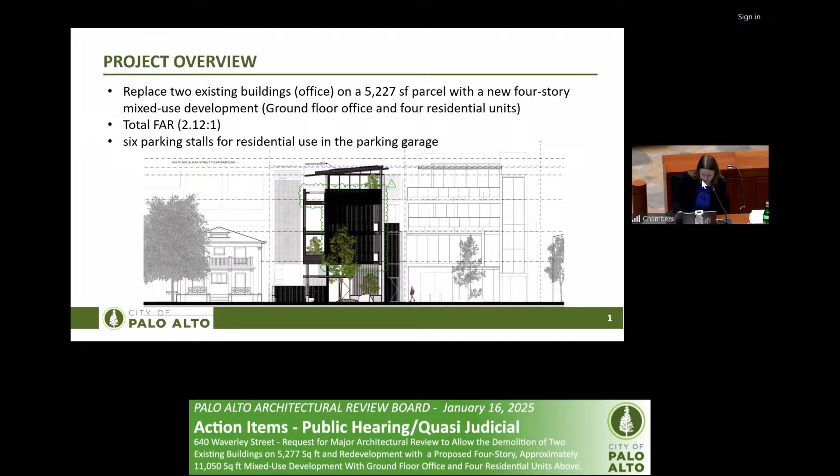The project is designed to meet the intent of the objective standards as allowed in the code versus meeting all of the objective standards. So the project is processed as a major architectural review with a formal recommendation from the board, and it's subject to the context-based design criteria instead of the objective standards. It's also subject to the downtown design guidelines, although there aren't really any relevant ones that apply to this project, and the CDC zone district requirements and the ARB findings.

This is just a brief site overview of the site plan.

Key modifications based on ARB comments included some additional details regarding how the parking worked. In particular, this is a unique design that has a lift system down to the below grade parking garage. There are additional details in the staff report showing how this lift system works. Basically, it goes down and isn't visible—there's a gate that blocks it when looking at it from the street. When a car needs to come out or go in, the lift system comes up, and this is a general concept of what that's going to look like.

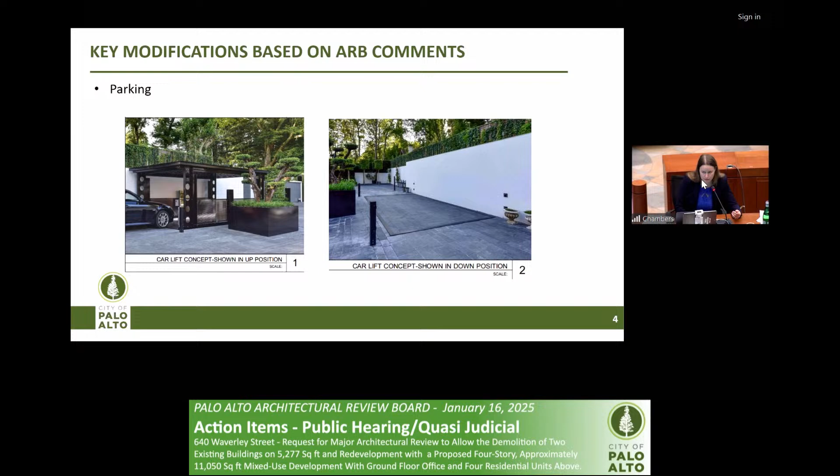This was redesigned, if you recall, based on a number of discussions with the neighboring property owner, who had concerns mostly about how this development was going to look in comparison to looking out his windows. He really didn't want something large in front of his kitchen windows on the side of his property, so the applicant worked with him to find a design that would be acceptable to him. This is what's now proposed for the project.

There were also comments about context with 636 Waverley on the other side of the property. There were concerns with how much cement was being viewed—could we provide a better design with less cement that the neighboring residents would be looking out onto? So there have been refinements to the design. They do have to meet building code, which was a significant concern in how to meet those comments while still meeting building code.

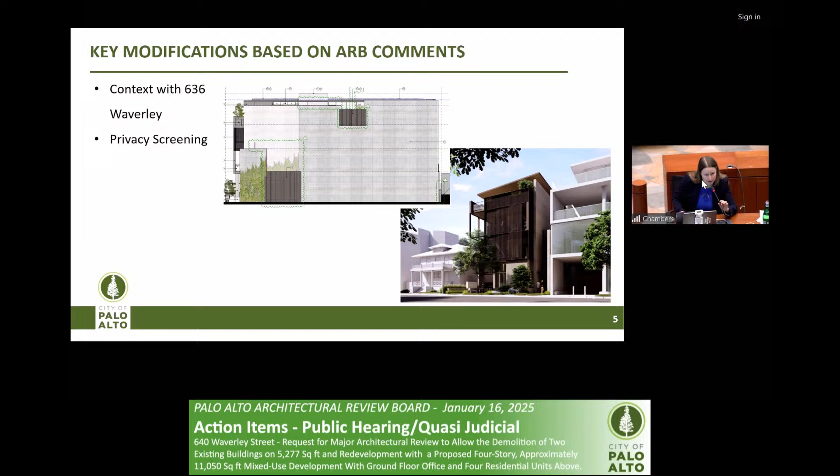There have been refinements to add different material on that 4th floor level, and refining the design and location of that outdoor area. Privacy screening on the frontage was also a concern—how that looked from the street, and whether it would end up looking too boxed in. So there were modifications to the design that added some space between the slats to allow a little more visibility in. I'm sure the applicant will speak more to that in their presentation.

There were also concerns about plant maintenance and planter design. Additional details were added to show the planter design and some modifications to the planter locations. There was also a memorandum prepared by SWA Landscape Architects to explain how the plants would be maintained long-term, and standard conditions of approval were added for long-term maintenance. We aligned the conditions of approval with what was presented in that SWA memo to require that they implement those measures.

In addition to these modifications, the California Environmental Quality Act review was not complete when we came last time, so that was the reason we could not make a recommendation last time. It is now complete. The city prepared, in conjunction with David J. Powers and Associates, a 15183 streamlined review for infill projects consistent with our comprehensive plan and environmental impact report. There were measures implemented consistent with the mitigation measures required under the EIR, mostly related to noise and vibrations to protect neighboring properties and residents, and standard conditions of approval incorporated for protection of cultural resources.

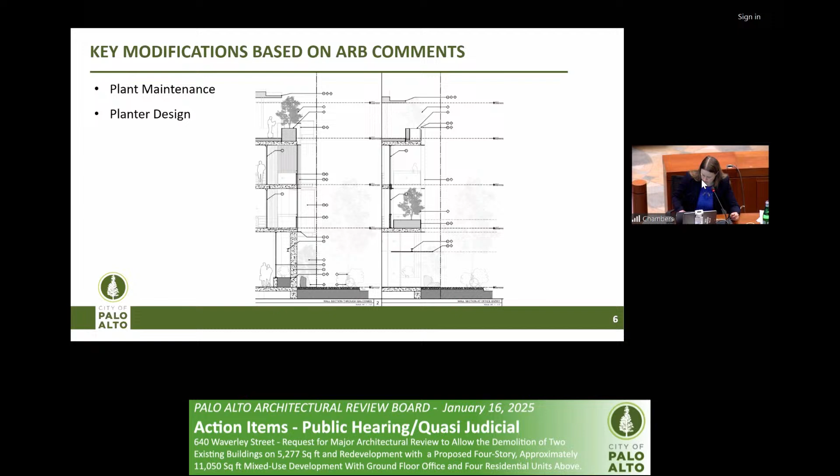Staff recommends that the Architecture Review Board recommend approval of the proposed project to the Director of Planning and Development Services, based on the findings in Attachment B and subject to conditions of approval. With that, I will turn it back to you and recommend that you hear from the applicant.

Thank you, Claire. I apologize, I'm a little out of order coming back to this first meeting of the year. I did want to ask for any disclosures and whether other board members have visited the site. Since this is the third time we've seen this project, I would assume everyone has visited the site before, but I'd like to restate whether they have visited it recently, and if there are any additional disclosures since our previous ones. We'll go down the line.

We'll start with Board Member Adcock. No additional disclosures. I visited the site at the previous hearing.

I visited the site on Tuesday, and I was not here during the last meeting, but I watched the video. I have no additional disclosures.

I visited the site at the previous hearings. I visited the site yesterday and this morning. No other disclosures.

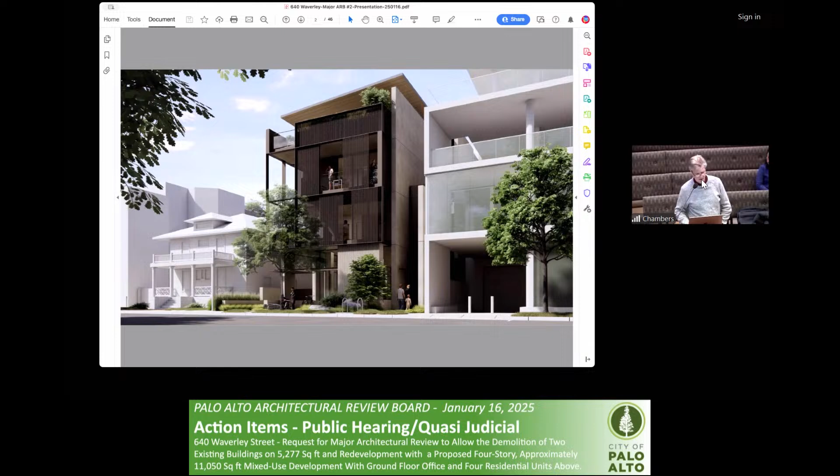We were here in June and had really good feedback from you, and there was actually a straw vote held, but no action could be taken because, as Planner Raybold said, CEQA had not been completed yet. Now it's completed, and we've used the time since then to respond to some of your comments. I'd like to go through those, as well as some refinements we've made to the project.

Just to reacquaint you, full screen. This is the basement. All the parking for the housing is in the basement, and storage is there for the residential units as well, so there's no commercial associated with the basement except for any kind of back of house.

Anything in red is essentially areas that we've addressed, either responding to comments or things we've changed. So we're going to talk about this side of the building where the residential entry is. We still have the paseo. Everything else is as you saw before.

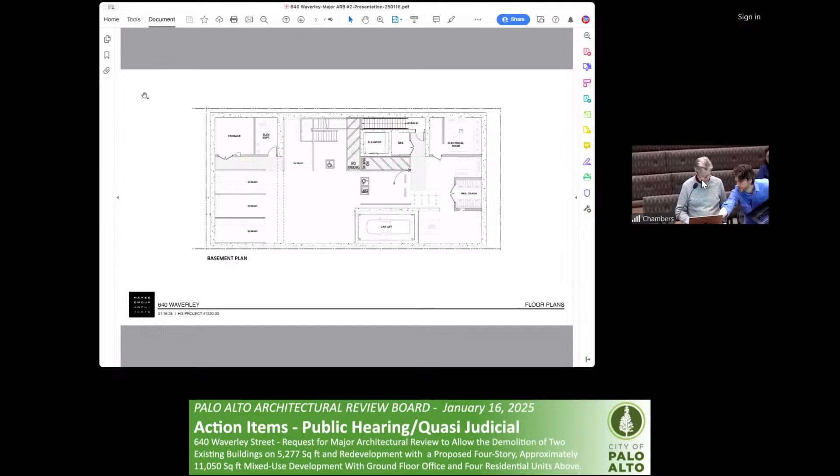You guys don't see it? We do not see any color on the screen. There we go, I thought I was in a PDF. Anyway, not a problem, okay.

So, all right, now that's the first floor. We still have the paseo, the stair two at the rear, the courtyard, the car lift, and now...

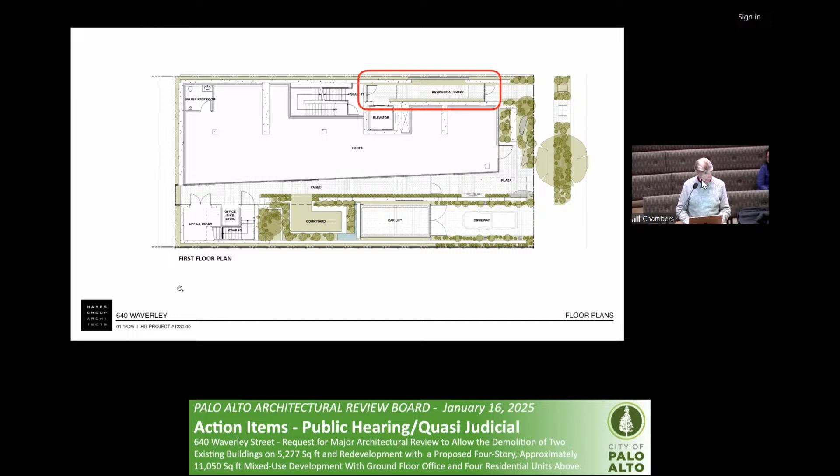All right, so now it's not advancing, Mason. What's going on? First meeting of the year always has hiccups. Okay, don't all worry about it, should it just leave me alone. Sorry, all right, stop share. Well, I can share. Ken, it's time to let your kid take over.

What time is it in the morning? Everybody reaches this point, you know. So,

Am I doing it? Yeah, I'm gonna let you do it. All right, so let me go back. And I thought these were PDFs. They are, yeah. But okay, all right, there we go. I didn't know why it wasn't advancing.

Okay, so now we're on the first floor, explain that. Now we're on the second floor. Again, we're addressing the residential entry area as well as stair two. On the third floor, similar areas that we've addressed. And remember, there's a 1-bedroom and a 2-bedroom on the second floor.

There's a 1-bedroom in front here on the third floor, and at the back is the owner's unit where their bedrooms are. On the fourth floor is the owner's living area, which we're also addressing, the screen in front, and you should have that with you there. Then when we get to the fourth floor, again, we're addressing the interface with 636 Waverley.

Comments from last time, you said, can you provide a diagram of procedures on how that lift works? I'm happy to do that. I have slides at the end of the presentation. We can cover it then if you're interested, but it's too much time right now, and since I screwed up, I have less time. So it's on A01.0 if you want to see it. This is the lift down and the lift up.

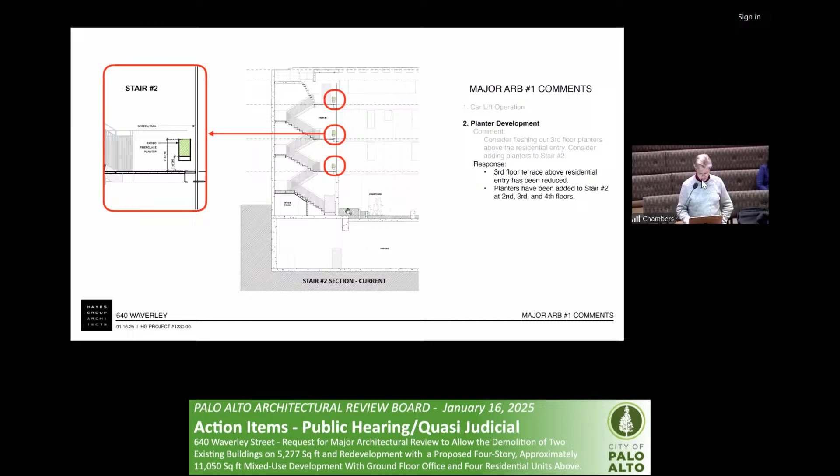On the stair, we have added planters at each of the landing levels. That's a planter that is fixed and attached, and it can be watered and maintained from the stair side, but the creeping fig will grow through the vines, and it'll also be creeping fig in the planter below, which is where we only had it before, and it was probably optimistic to think it would grow all the way up the lattice.

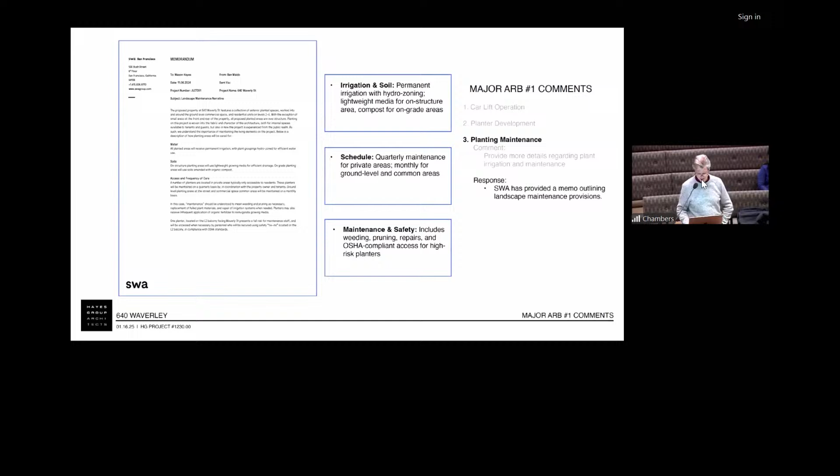SWA did provide details regarding planting and irrigation. The takeaway is there's permanent irrigation to all the planters in ground and raised planter areas. The schedule for maintenance will be quarterly for all of the private areas and monthly for ground level common landscaped areas. Maintenance means replacing dead plant material, fixing irrigation systems, pruning, weeding, and so on, as well as access for planters that will require OSHA compliant access, which is a couple planters at the front.

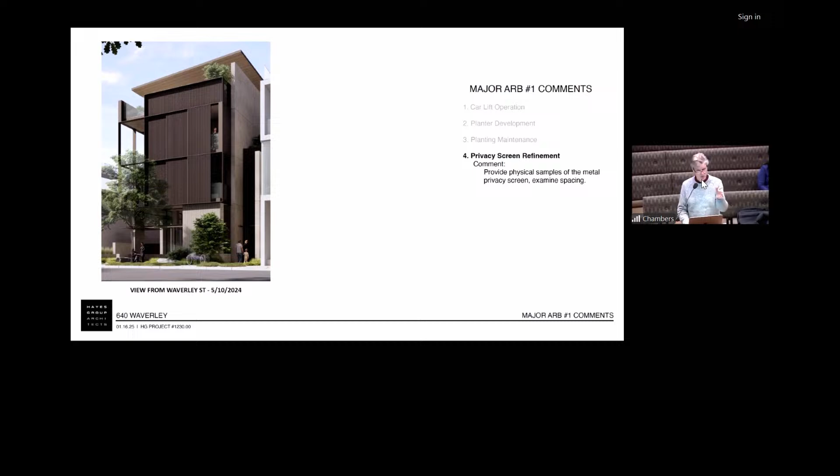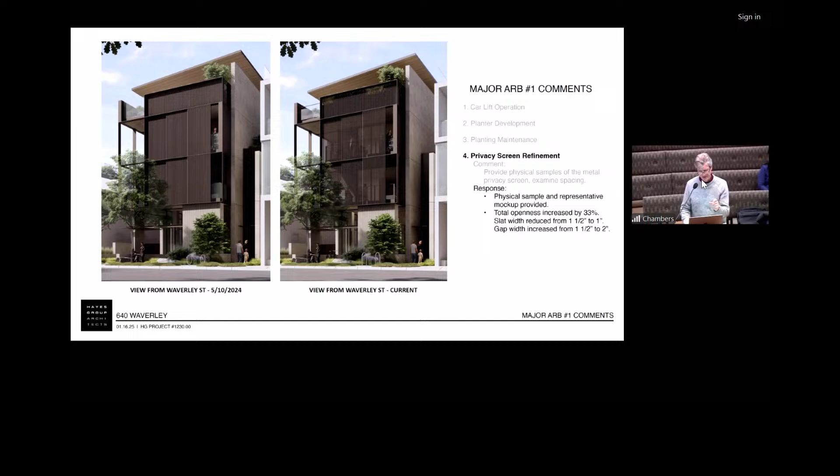Another comment you made was maybe you should study the spacing of the grill work, which you have there in front of you. We've increased that spacing by about 30%. So it's a 25mm bar, or it's an extrusion, and then a 50mm space, 25mm bar - so it's like 1 inch, 2 inch, 1 inch, 2 inch - and that will be the spacing of the screen, and the screens still stay operable at the front so that you can control your privacy there.

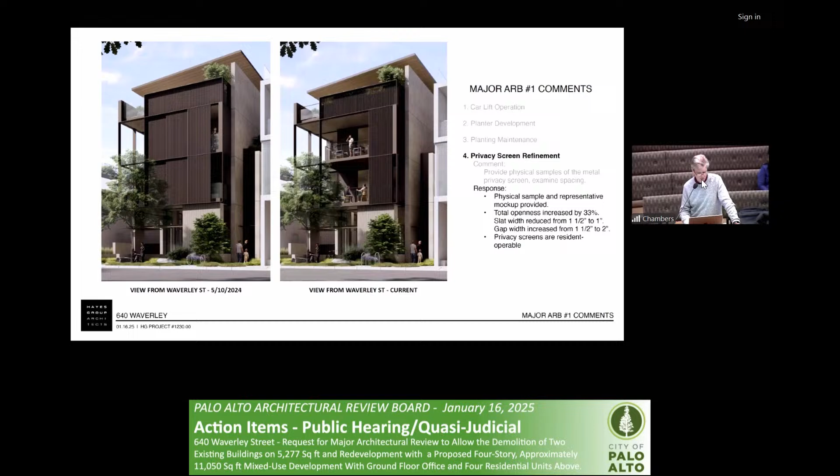This is where we were last time on the interface with 636. You said, hey, think about maybe how it could soften up and respond better to 636 Waverley, a building that we also designed 10 years ago.

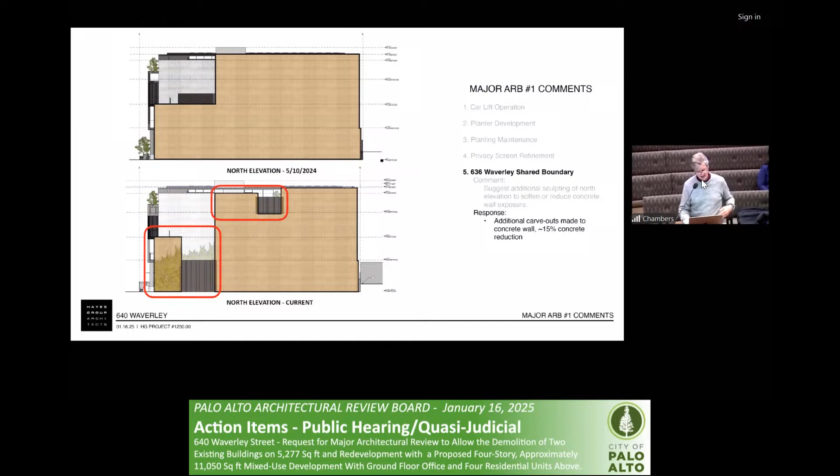Looking at this, the gray drawing on top was the previous submittal where we had all the concrete, and now we've modulated it down below. We've created more cutouts that reduce the scale, but what's cool is that those cutouts now respond better to the footprint of 636. So where 636 has a void, we've increased our void into the building there.

So inside, actually, it's much nicer. You can see the sky. You'll get some late afternoon sun, perhaps, but we still have the privacy that we want from the unit next door. Those are bedrooms of the unit next door that would face into this area.

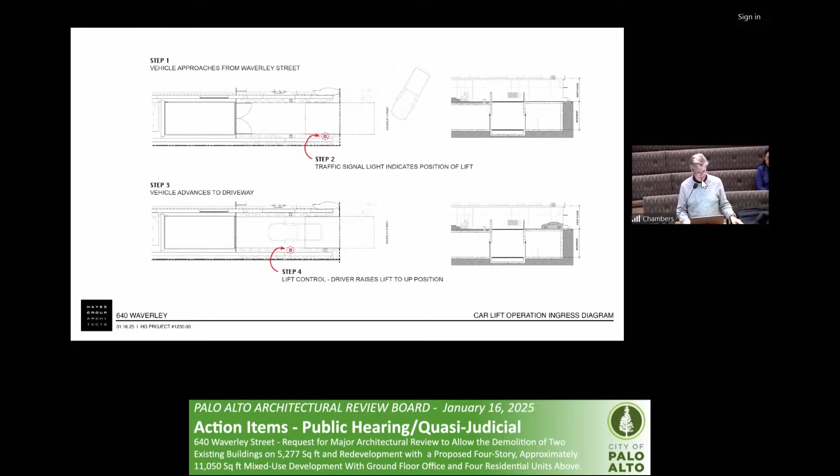Step one, as you drive down Waverley Street, there'll be a traffic signal on a bollard that will either be red or green, indicating whether the lift is in use. You would pull in - that's step two, the traffic signal. Step three, you pull your vehicle in on the podium on the left, you hit the button, and the lift rises up from the basement. It's always in the basement.

Then you hit your fob in the car at step five. The gates open now that the lift is up, and you drive onto the lift platform. Step six, you hit your fob and the gates close, then step seven, you hit the podium, and you descend down into the garage as the diagram on the right is showing. Step eight, you get to the bottom of the garage, you hit your fob, the gates open, and you drive into the garage.

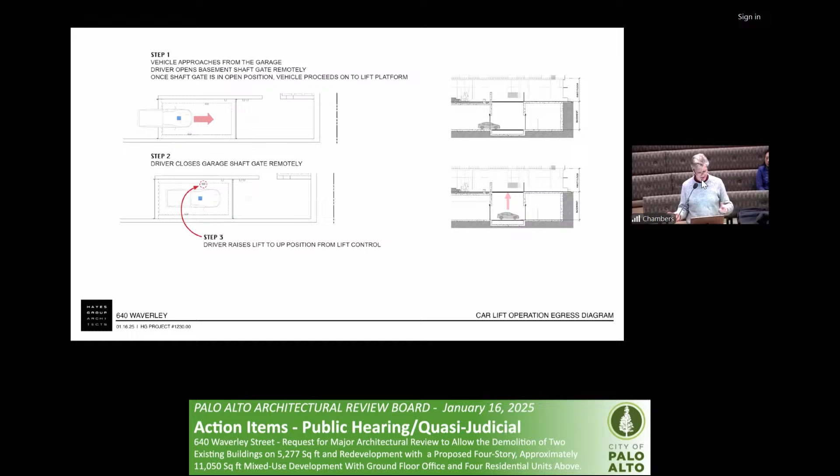And then it's kind of the reverse going out. Probably don't need to go over that, but you hit the gate, you come in, now the podium is on the left, or the button - there's two of them, one on either side of the vehicle. And then you go up, hit the fob, and out you go to the street.

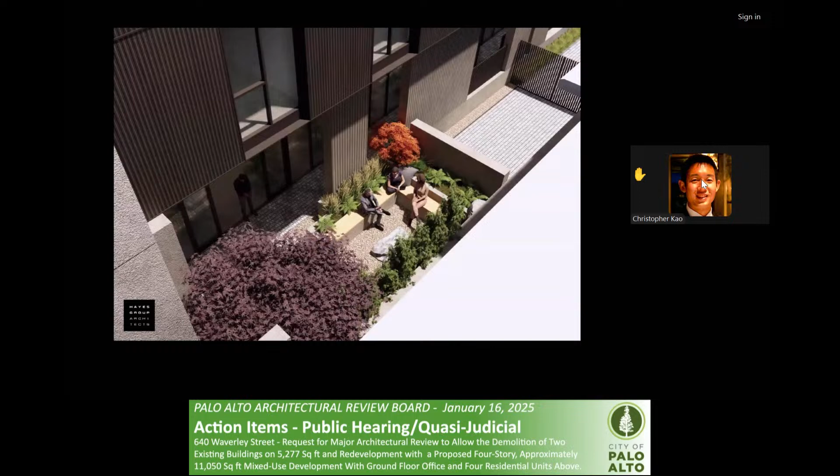Okay, I am a resident of East Palo Alto. I often see this existing building, the one that was mentioned at 636. I'm a big supporter of this project. I remember the first time I encountered 636, the existing project, was when I would often frequent the Palo Alto Farmers Market on Saturdays, and because the parking lot is right there to the south, it's the one thing you see. I've always been really inspired seeing that building. I think it is really cool seeing that density, and I liked all of the landscaping on it.

I always wondered when this lot next to it would become something like this, because it kind of stands out right now. It'd be nice to have more. So I just wanted to offer some support for this project. I'm not getting compensated to say this or anything, I'm speaking freely, and I just think it really beautifies this part of Palo Alto.

Thank you very much for your support, appreciate it. Is there anyone else? That's all our speakers.

Did we also get a letter of support in for this project sent via email? Yes, correct, part of the public comments emailed out yesterday morning. I can briefly summarize: it was Stephen Levy, who noted that he lives nearby this project and expressed support for it.

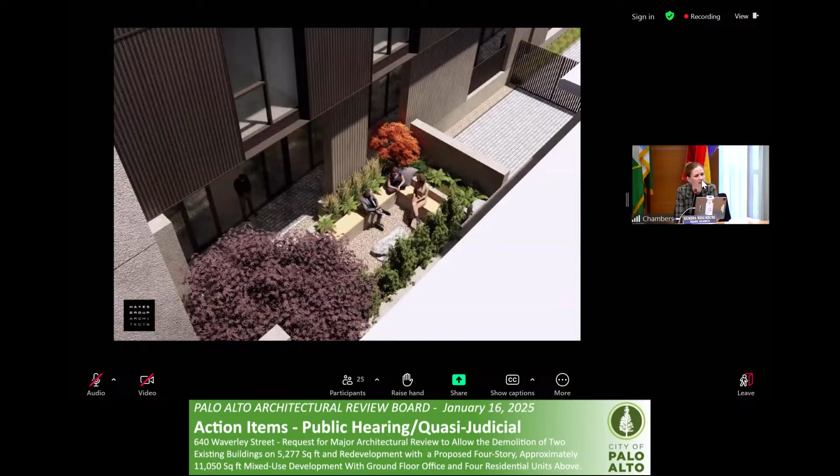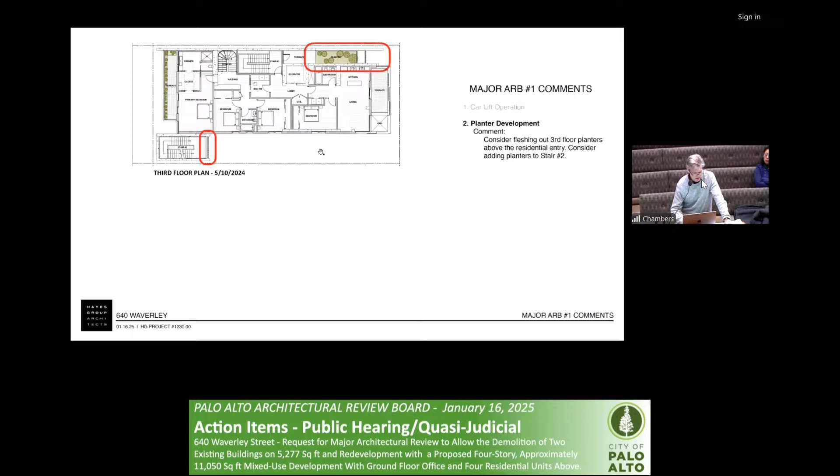Morning, Mr. Hayes. The rear paseo, does that open to that rear parking lot, or is that closed off now? No, it is open. Okay, and one of the floor plans, if you don't mind pulling that up, that main floor plan. Yeah, there's a planter, there's an elevation difference, several feet, like probably 30 inches. But when you look down the paseo, there is daylight and you're looking above - that one, yeah, that's green open there, yeah, that's a low planter.

Okay, so can you walk from that paseo out the back? No. No. Okay, and the reason for that is it's private property owned by the city. Was there ever consideration for a gate on that rear end, anything like that, just in case there was an emergency egress situation, something that would 99% of the time stay shut, but just in case of a quick evacuation could provide that? We've never considered that, no. Okay, not a problem, just asking.

And then with the car lift, I really sincerely appreciate your clear example of how that works. My question is in regards to right of way, and I don't know if you'll necessarily have the answers right now. If a car is coming down the road and trying to pull in, but there's a car actively coming out, I assume that car would have the right of way. Now the question is if there's a car that wants to leave and a car that wants to get in, and neither of them have gotten to the lift yet, who gets the right of way? Is it just whoever hits the fob first, or is it sensors?

I think that as soon as someone activates the gate in the basement, the light will turn red. And there's probably going to be 2 minutes between that time and when the car actually is able to leave at the ground floor level. If there's no traffic, you've got a car waiting. If there's traffic, I would imagine they'll go around the block and then come back.

But there's only, I mean, there's 8 spaces the way the city and the state counts parking, because the unloading space for the ADA van and the EVSE are counted as spaces, but there's really only 6 cars in the basement. So we don't anticipate a lot of traffic. Sure, and yeah, it's a rare instance, I just want to see what it's accounting for.

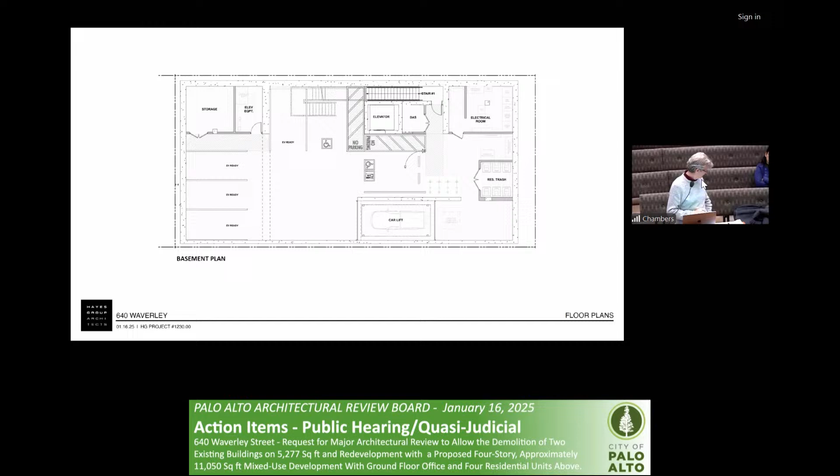Okay, it has a gate, so you can get traffic. Oh yeah, it has a gate. Okay, thank you. So yeah, you could. So the residents bring their trash up that way.

The trash room for the residential, in the set there's a page that diagrams how the residential trash facility works in the basement. Originally we had it all at grade, and one of the comments we got at the preliminary was to separate them. I think Board Member Hirsch said it, separate the residential and the commercial, and the residential maybe needs to be more convenient, so we put it in the basement. If you're going out, you bring your trash down, but trash on trash day can be taken out up the car lift.

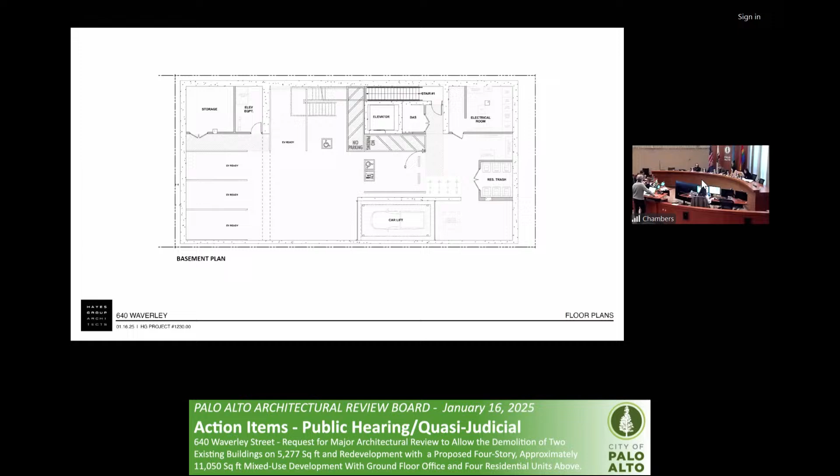And so there is a gate. It's pretty convenient. Okay, all right. That's all my questions, thank you very much.

May I ask a follow-up question on the gate? The car lift gate, how does it work? Is it functional like up and down, or swing? Swings, okay. The gate that is at grade, at the driveway, no, at the basement, I believe they go up.

And that's why you have the basement so deep. That's one reason. And there may also be an idea of future parking. If there's ever a need for future parking, it could add lifts, or something. Yeah, I was going to ask whether you considered the puzzle parking system if needed.

Yeah, so we're fully parked for the residential right now, and then there's no commercial parking. This project does not work if commercial parking was imposed on it. You cannot have a driveway like we have. So that opened this whole thing up was when AB 2097 allowed us to eliminate the commercial parking requirement.

Yeah, I understand that parking is actually not required in this case for residential, but you provided some parking space in this case. And if you consider the puzzle parking system, then maybe you can save one space for maneuvering, like turn back and be easier for the car to get in and get out on the lift. Oh, like a backup space or something, right? Yeah, right.

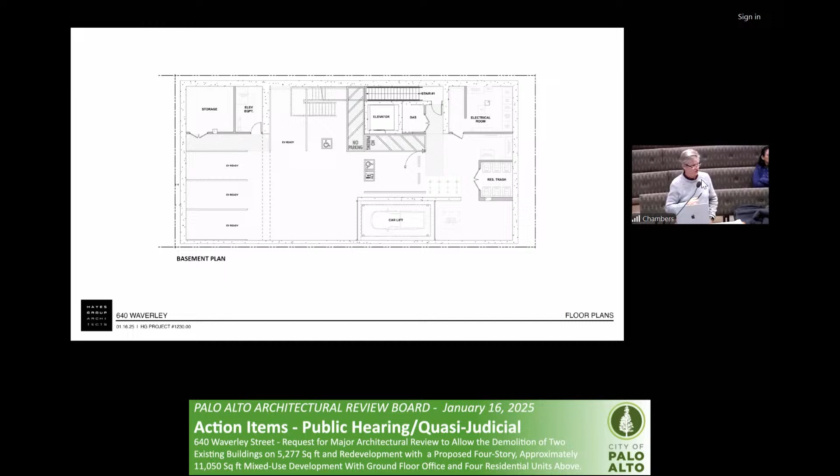And for the privacy screening, the finish would be wood look-alike, or? No, it's not wood, it is the other finish. It's the dark ribbed finish that Board Member Hirsch is holding right now. Okay, then, those are the fins. Board Member Hirsch, do you mind passing some of those down? Yeah, we will hold them up for the camera. That's the spacing, okay.

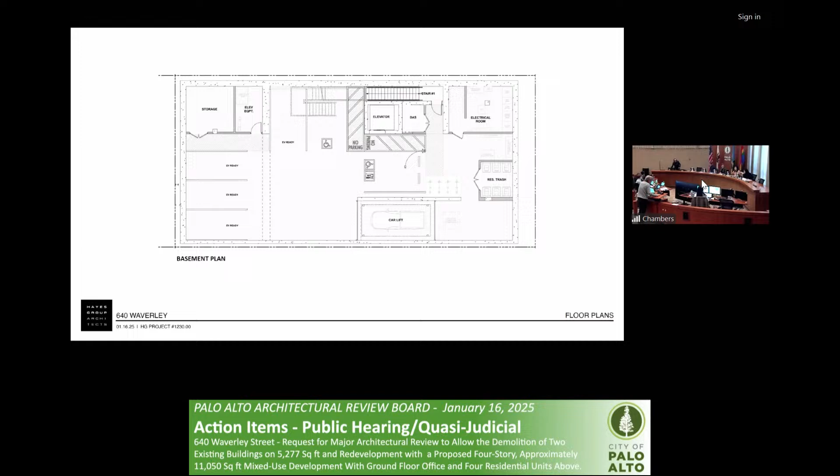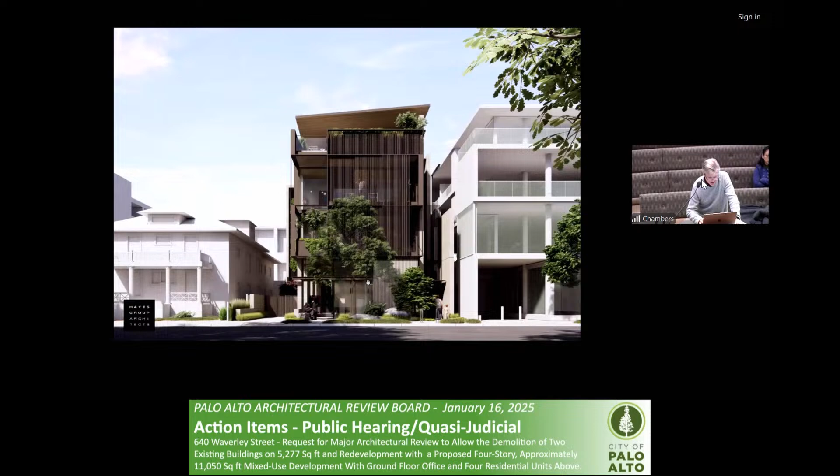Okay, on the rendering I saw there's a canopy looking thing leading to the paseo. What's the thought behind that? When I saw the rendering, I thought maybe it's leading to the main entrance, but the main entrance doesn't have a canopy feature like that. It does actually, let me show you - that canopy goes all the way across the front area, but it doesn't extend down the paseo more than a few feet. It's hard to tell from the rendering.

We're trying to accentuate just the geometry of the paseo, so we have the structure going all the way across. The main door to the ground floor commercial is parallel with the street, on the right-hand side. You're already under the building at that point, so you're protected. The structure of the canopy kind of frames it - it's partially defined by the canopy, but the protection is provided by the building above.

Got you. So what's the supporting system for this canopy? I saw something above that is... that is a steel plate, and you see the rod on the left coming down. That rod holds the horizontal T-section, which is then supported by the concrete wall on the right. There's another one further in that's going to do the same thing.

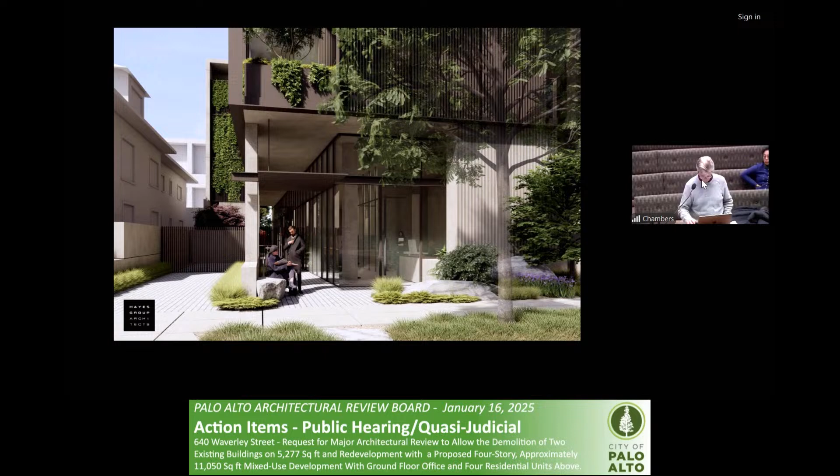Got you, thank you. And another thing on the fourth floor - you changed the material where the tree garden is. Correct.

What is the attachment, the detailed treatment for the connection between the metal panel and the concrete wall? At this location we don't have any fire issues to worry about since everything is open to the sky. I see this as a steel plate of some kind, painted to match the other M2, the general metal color. It would be attached on the outside of the concrete - you see the concrete curb at the bottom, and the plate would come down on the outside of that, most likely attached into the concrete, so we don't have waterproofing issues to worry about there.

So from the neighbor side, they will see some of the attachment connections. Okay, yeah, alright, that's my question, thank you.

Can I follow up with some material questions as well? On the rendering we're seeing on the screen, the vertical boards - is that the tongue and groove wood cladding? Correct, if it's on the outside, yes, it's Western red cedar. We'd like to bring that to the inside so you see it on the ceiling as well.

Okay, that's what I was going to ask - so the ceiling is also tongue and groove? It'll be shiplap of some kind, with a reveal probably. And that only occurs at the fourth floor on the upper residence, so you don't see that wood anywhere else except the top floor.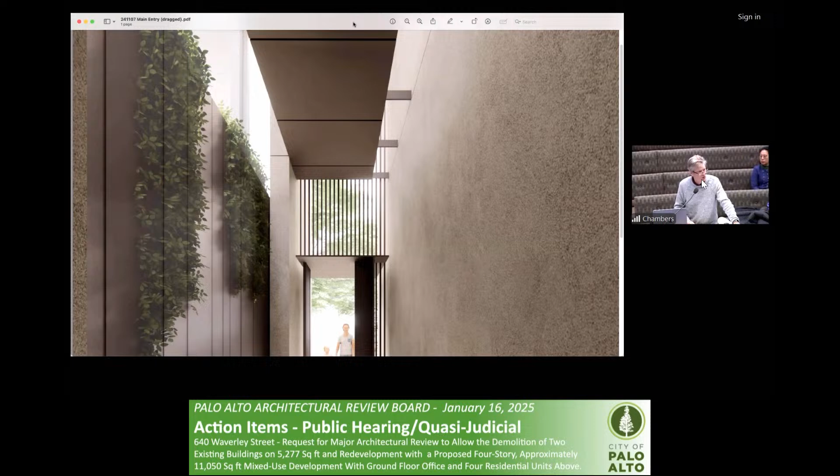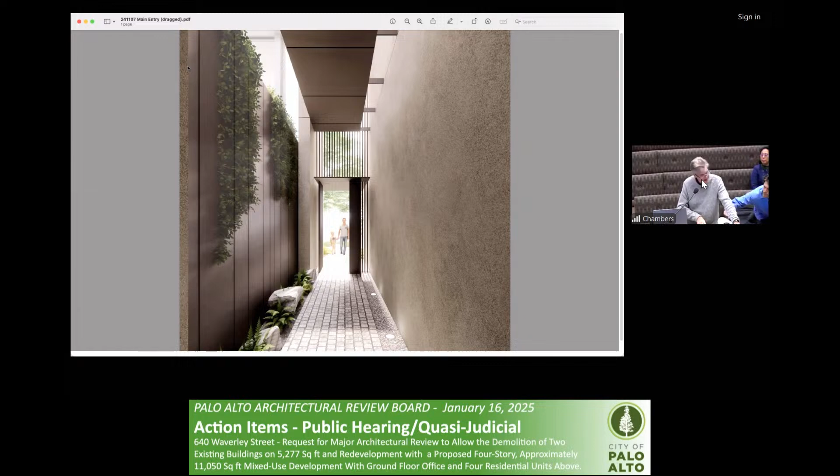Now, there's a cross section the other way, and I was looking this morning. So go to A308. And graphically, the drawing could be better. There's a line weight issue, but you see where it says residential entry. On the right-hand side, the poché wall is the metal wall. And then there's a steel canopy.

And we have an image Mason can provide, put Mason up on the screen as well. All right, that's it. Okay. Oh, there you go, you're right, Peter.

I need to go home. Good, it's been anticipated. Thank you. You're doing great, keep going.

It just didn't get into our packet, but that's essentially the vision of that. We think it's much nicer than what we had before. It was a 2-story space before, but it was capped with concrete and we had a planter on top. But now it makes the entry a little bit more dramatic, I think, and has light. And we can get plant material in there as well.

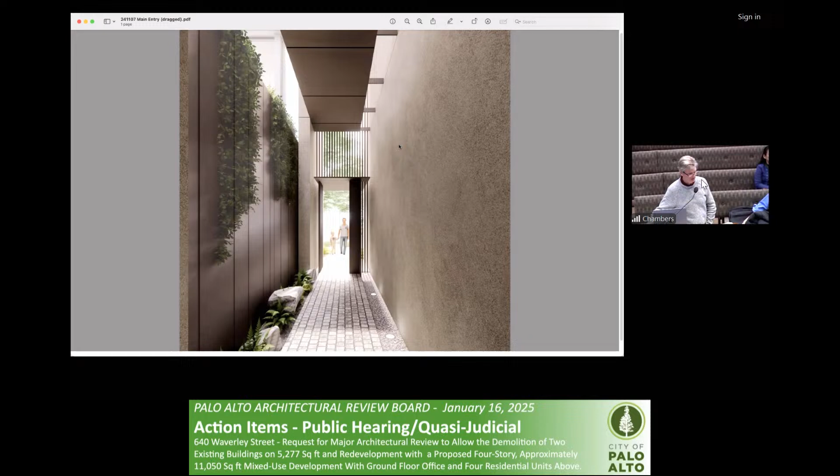So your idea here in many cases is to have walls slip next to other walls, right? They slip next to other walls. Right, there's a kind of a separation, and they slide, that defines the materials and keeps them separate. Right.

Okay, and then you also see that vocabulary on the commercial canopy entrance as well. So it's consistent. Yeah, and then that would be the fourth floor too.

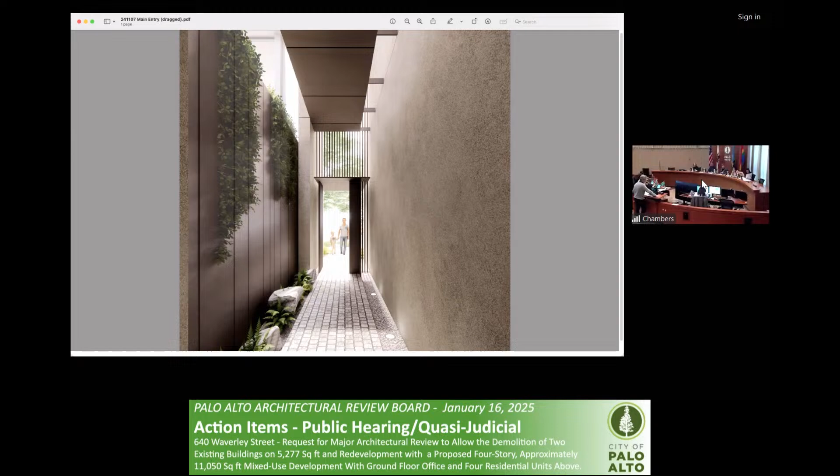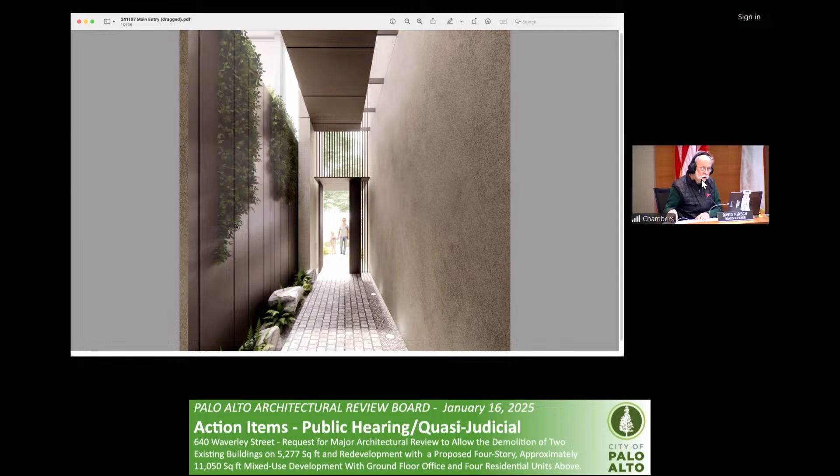So at the rear of the building, the interior wall is kept in a little bit, but there's a kind of in-out issue at the rear of the parking lot, in the wall construction there. I couldn't really understand what's outside and what's inside on that.

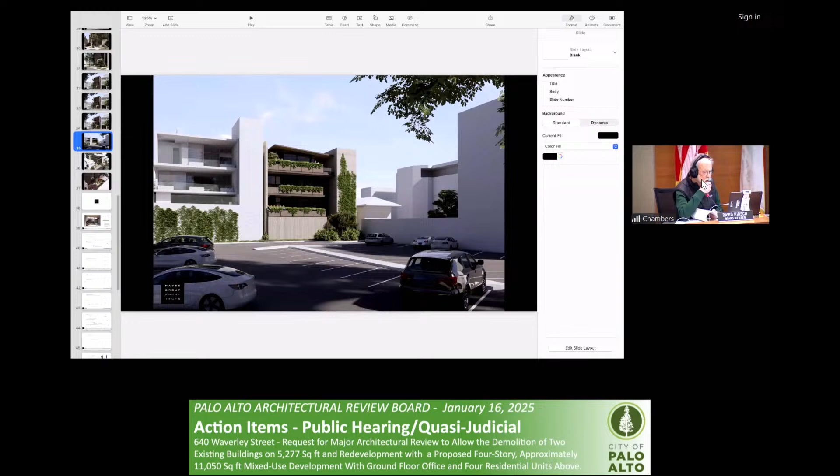So should I go back to sharing? Yeah, yeah, so you see there, let me go back to my set of drawings. Is there a section through that?

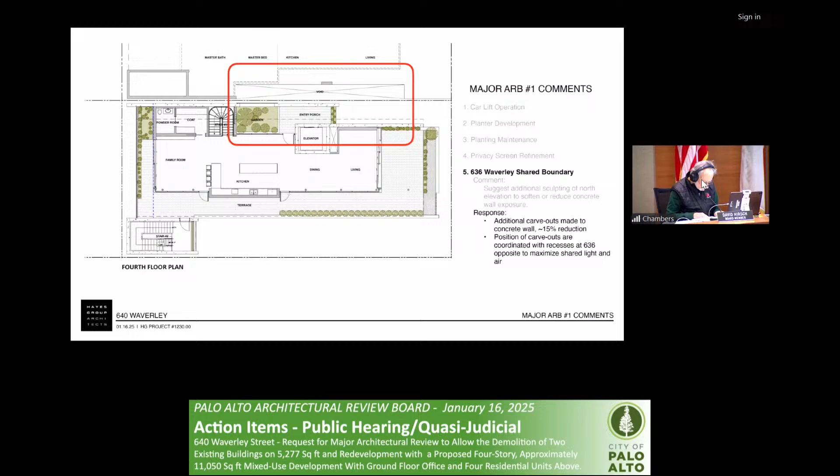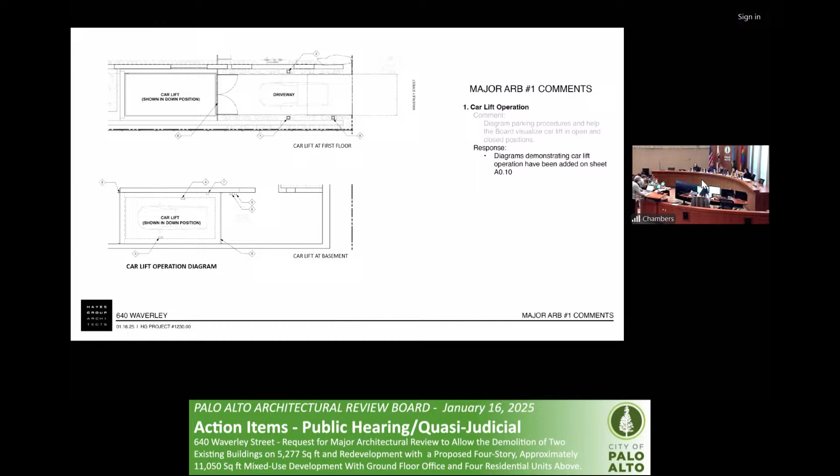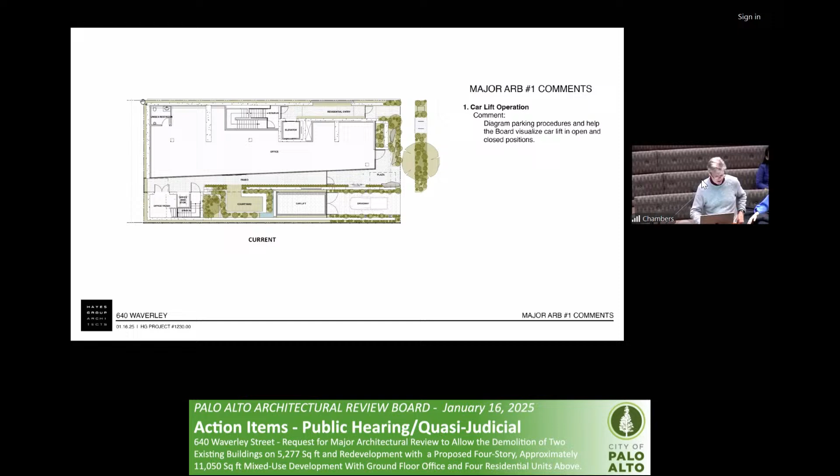So at the rear, if I go all the way down, the main wall on the first floor is 12 inches in from the property line. That creates an area where we'd have vines planted on the city parking lot side of the wall, this part here. You can see my cursor. And then this part here, by the member gate, is open - that's like a 5-foot opening, daylight from about this height up to 14 feet.

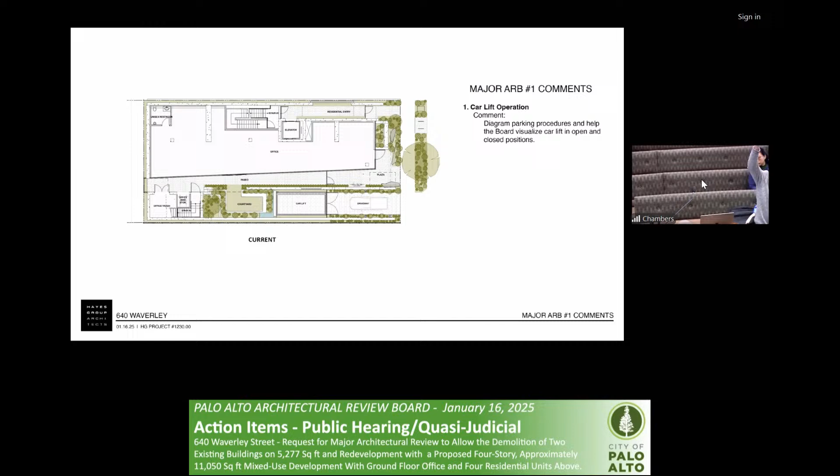So you're looking at the cherry tree, up to the overhang. The overhang is actually - you see the dotted line here, and then it returns there - that's open to the sky, because otherwise we'd have a fire issue with an opening in an exterior wall.

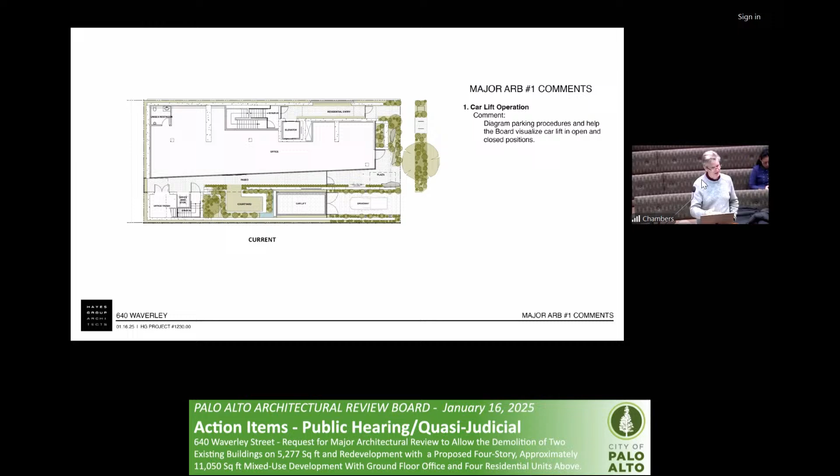And then the stair is in alignment with the concrete wall on the other side, and again has the creeping fig there. So if I go to the next floor up, this notch here goes all the way down to that first floor, and that also provides fire access to this rear bedroom as well. Does that answer your question?

That's fire access - so they can get a ladder to that window. Right, the fire department diagrams there.

Sorry, I was really talking about what happens with the rear of the building, where it looks like it comes out and comes in - the rear of the solid, residential area of the building. So the wall here on the upper side there with 636 goes all the way out to 1 foot from the property line, and that runs full height. Then these balconies cut into that, so this becomes the rear wall of the building, except where the balconies are.

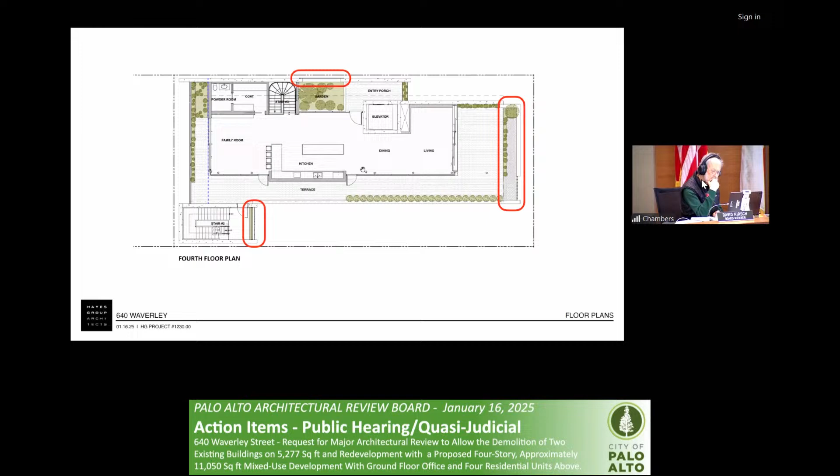And then at the fourth floor, obviously the roof above hangs out to about here, I'd say, and everything sweeps around the corner as well. The rest of it wraps around the corner, right there, like that. But this wall here aligns with the wall below it, which aligns with the wall below that, so that lines up all the way down. And then this terrace here at the second floor is on top of that first floor commercial space.

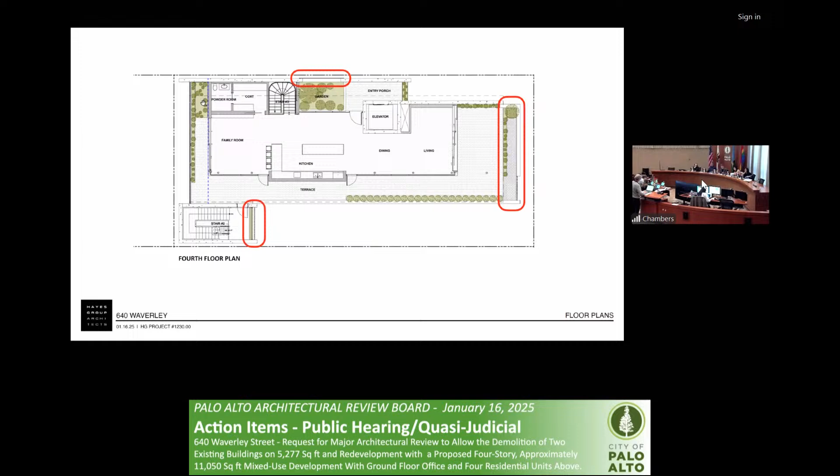Used by the residential. Do you want me to go to the 3D view? Yeah, I guess that would help.

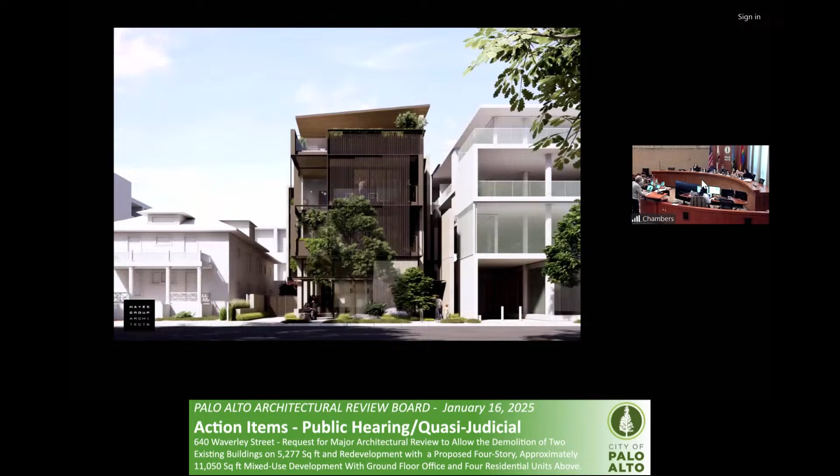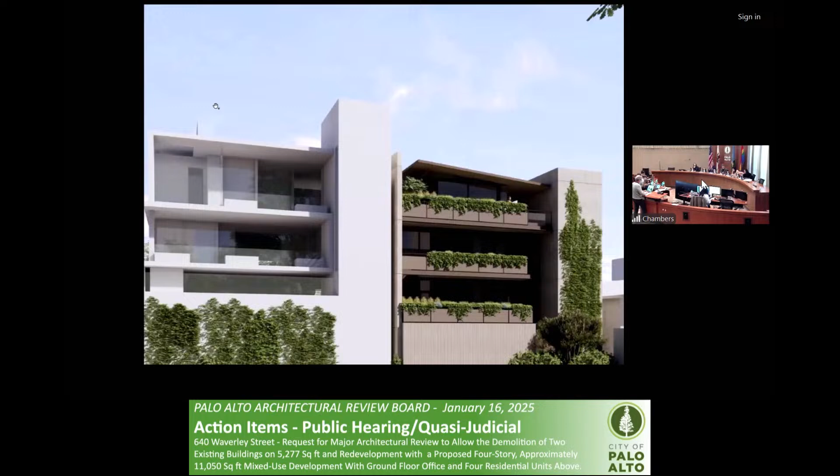So you're actually - that's again the sort of slippage with a concrete wall, going all the way up. This slides right through that opening, and the stair is an autonomous form. And that roof line above is kept back from that edge.

There's also a gap there, yes - there's a gap at that end as well. There's a gap or setback between the sloped roof and the... or there still is a gap there, yeah.

Okay, that's it. Yeah, that helps a lot. Good, I don't know if this drawing was in our packet - maybe it was, but I'm not sure. I mean, the drawing I had printed was really, really dark. It was hard to see how things related.

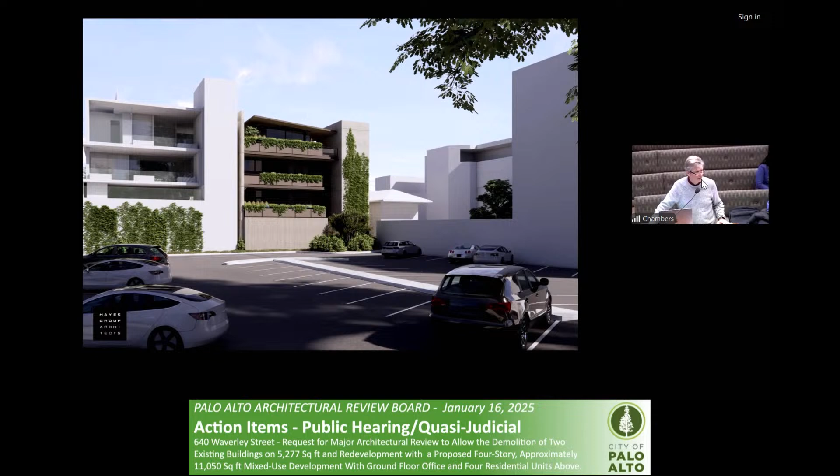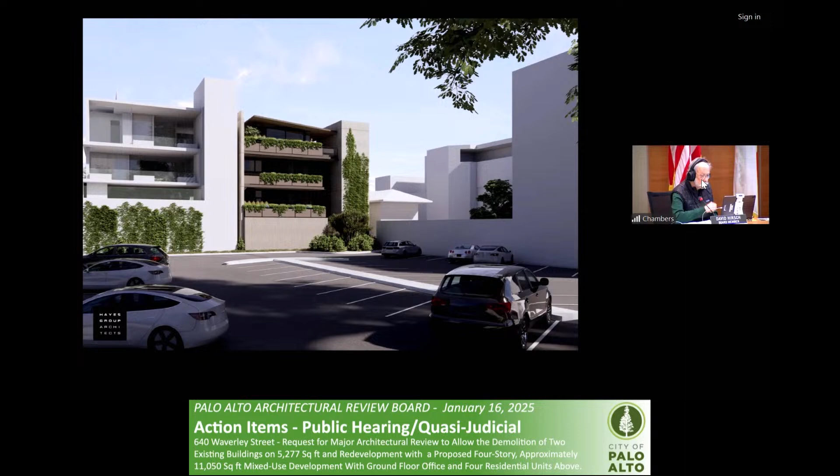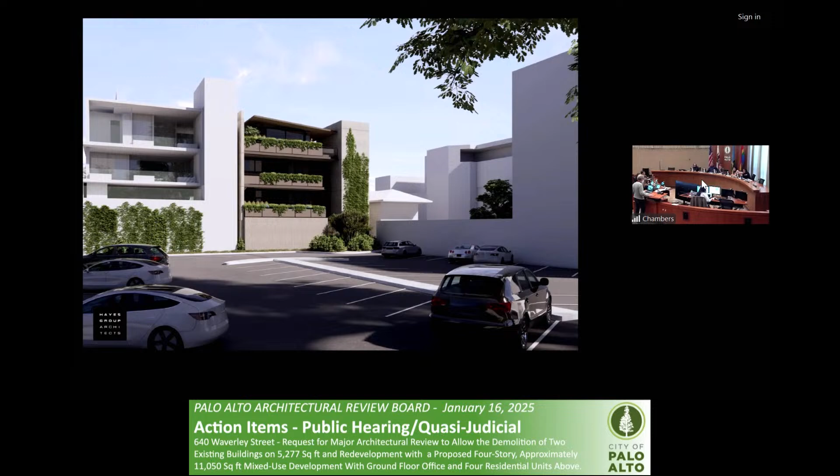Can I ask two questions? One is a follow-up on the planter back here - so you said it's about 3 feet tall at the ground floor. Is there fencing or something for security, like a standard 6-foot bar fence at the back of the opening? Yes. Is the same security concern there - anybody could jump a 3-foot planter? Yeah. But there's no gate, there's no access.

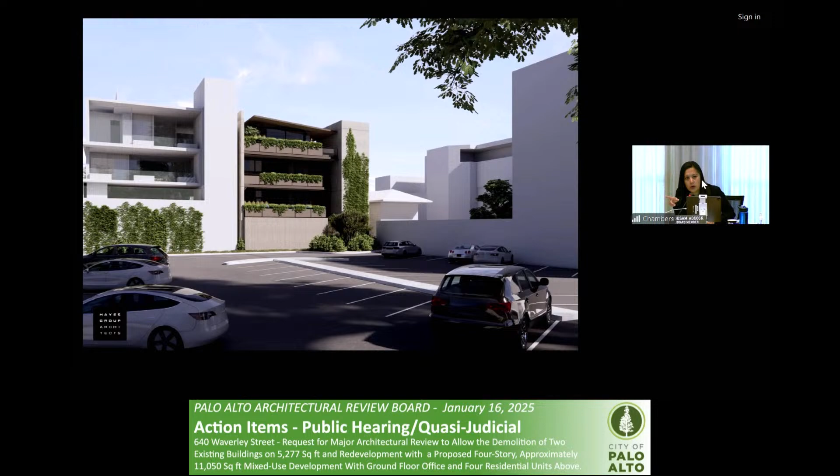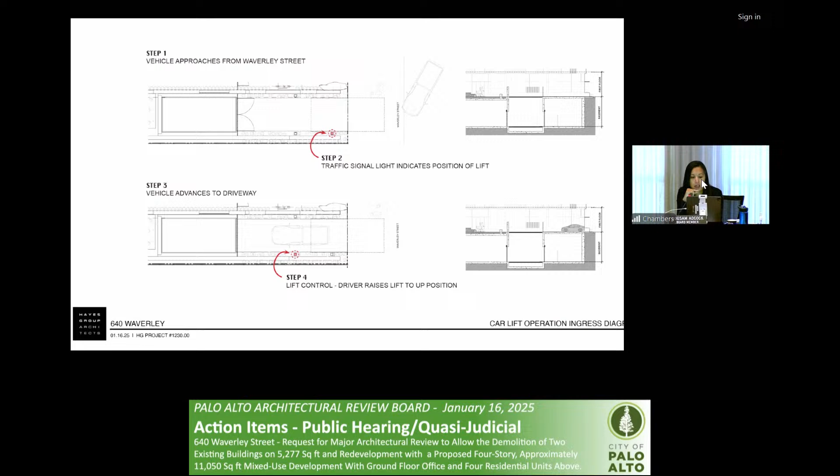And the other question is, if you could go back to your diagrams about the car lift - I think it was diagram number 1 where the red light turns on, but from the street level itself, did we show it? No. So I guess it's step 2 - from the street, with all the planting and trees, is that light visible as you come down the street before you start turning? Yeah, that's the idea, that it would be something you could see from either direction.

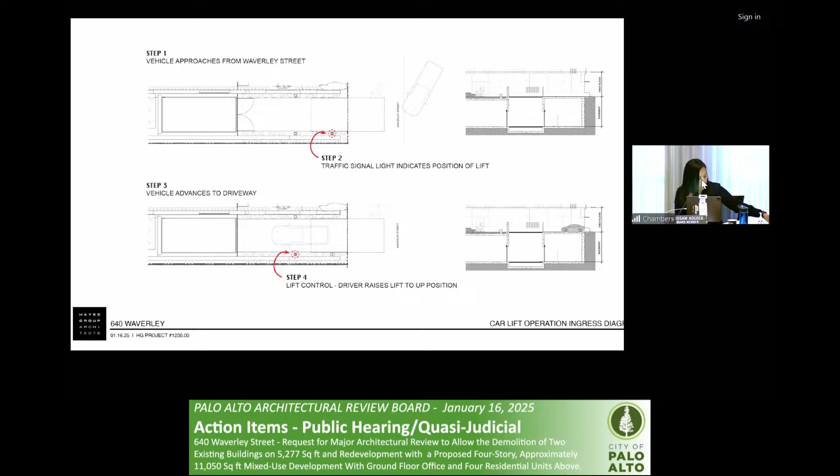It's like a bollard, but it's not high - bollard mounted height light. I was just trying to relate this to your overall site plan to try to understand the visibility down the street, because obviously you don't want people to start turning and then have to back up after realizing that it's on.

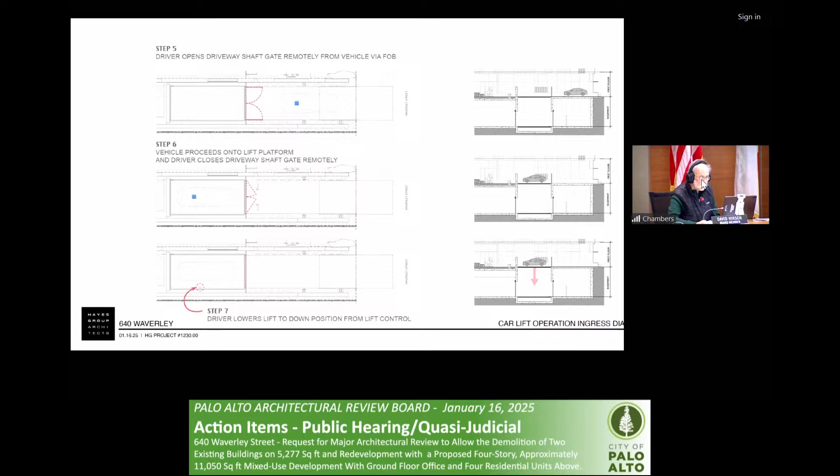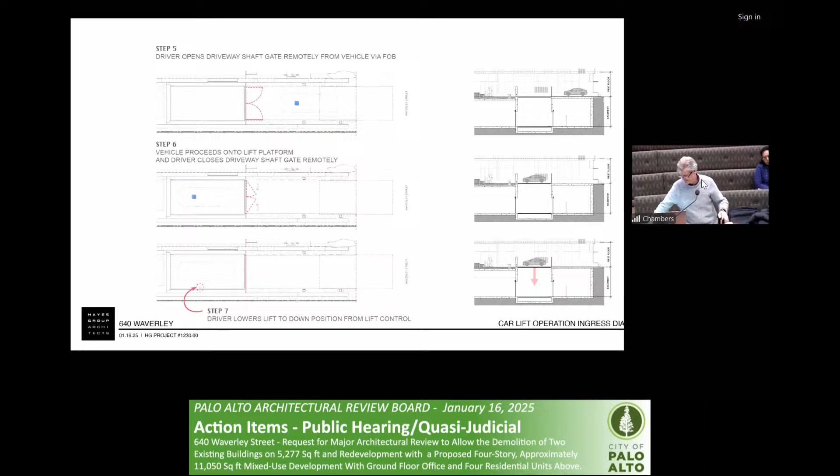On that issue, you'll have some discussions between all of your tenants so that if it's red, they'll be told don't pull in. There's going to need to be some protocols reviewed with the residents. There's no guest parking required, so it's only residents that would be going down into the garage. Out of curiosity, are these units for sale or for rent? They are condominiums.

Board Member Baltay has no questions. I don't believe anyone else has any further questions. So at this point, we will close the public portion of the meeting.

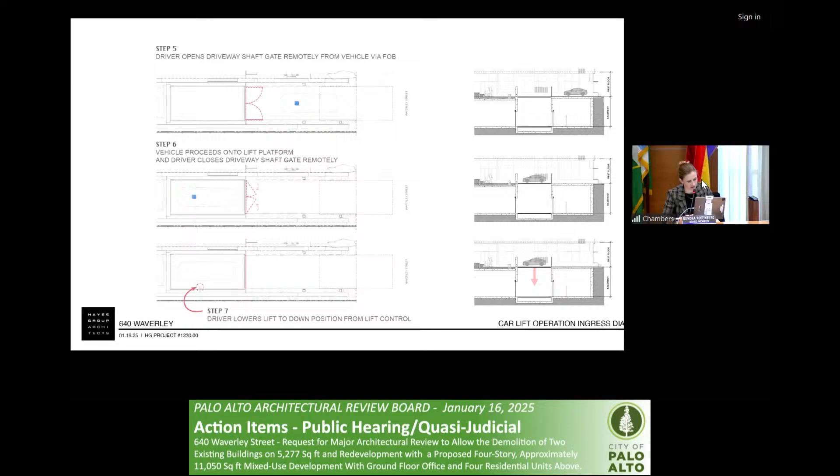If the ARB would like to have any internal discussion on this, anyone want to kick us off here?

Thank you, Mr. Hayes also, and Mr. Hayes. Hayes squared, Mr. Hayes squared. I see a rebranding in your future.

I'll kick us off. I think that this project is stunning. I'm a huge fan of it. I think it's really quite lovely. I think the dynamics of the front facade and the panels really benefit from increasing the spacing between the slats. I think it adds a lot more vitality and vibrance to the front facade of this building. I think the way those panels slide back and forth, it's really going to feel alive, right? This building's going to constantly be moving just from the people utilizing the spaces they live in, which I think is quite interesting.

I really appreciate the thoughtfulness to the car lift. I know that anytime we have something new in terms of technology, there's going to be some extra questions and we're going to see how it works, but I appreciate that parking is provided. I know a lot of California rules are writing that we do not need parking. I think we live in a car-driven society, and to not provide parking for people who live in a unit is a little silly in my mind. So I sincerely appreciate the efforts you're taking to provide parking for the tenants in your building.

I appreciate the thoughtfulness of the trash compaction, getting that out to the street via the car lift, which is quite clever. I sincerely appreciate all of the thoughtfulness. We haven't even spoken to the landscape architect who I know is online right now, so I wanted to tip my hat to you as well. The landscaping has been quite lovely every step of the way, but I think the steps you've taken since the last meeting to today are going to really increase the beauty of this property. So, well done. Thank you.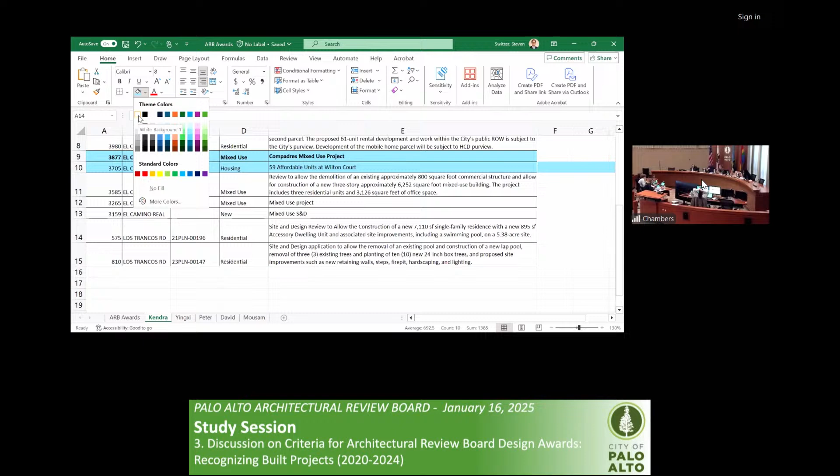Well, we did have quite a bit of back and forth discussion on that as well with staff, saying should we be reviewing single family homes? Because it's not something that ARB typically does, but they are worthwhile architecture in the city. And at the last award ceremony, we did have a single family residence, I believe it was on Forest.

I think how we handled that was we put it as an honorable mention. No, as opposed to that, that's a multiple dwelling. The one on Forest? Yes, I'm pretty sure it's multiple, not single family. Okay, so I mean, it is a discussion.

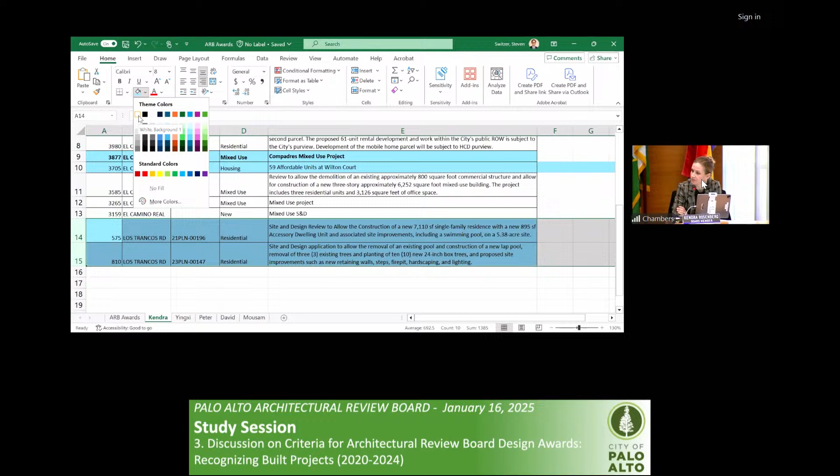If we think that single family homes are not necessarily typically within our purview, well, we should strike them out of the gate. Another way to think of it is we didn't really evaluate the architectural merits of the single family home design.

We were focused on the site impact, clearance to a creek, and what setback they would have to have. We were just advising council really on that large scale environmental issue, and I don't think that type of advice is worthy of giving an award to. Okay, fair enough. That's my two cents on it.

Does anyone else disagree?

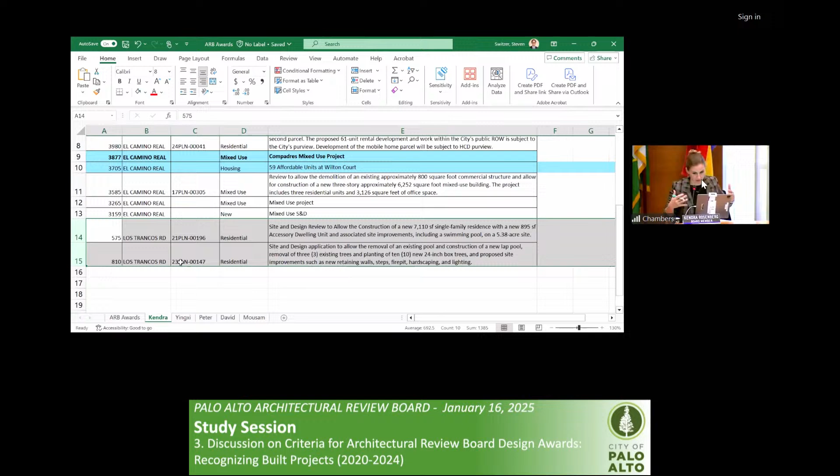Myself and just myself, okay, passing along. Good, we got plenty.

Let me be sure I understand, this is the strip, the El Camino, any projects along El Camino? More or less, but once we get to that Page Mill El Camino intersection, that actually fell under a different lump, that was for Yingxi to tackle.

However, we did have some overlap, but we tried our best geographically too. So I'm just digging deep in my memory here, but there's that hotel next to Redwood condominiums.

It's an empty lot, never built, painted all red. It came forward but was never developed, never developed, it's just a big empty lot. Yeah, after all that, no, it's never built still, still the same empty lot.

There's one next to the red building, I can't remember if it's empty right now, but I looked it up. There are other considerations being proposed, but their entitlement expired and they never constructed. So there are other considerations going on for the site. The project we reviewed is not constructed, period.

Next up, David, you want to go? Just going back to your list, Chair Rosenberg, so the 6 that are left are basically complete and for future discussion for eligibility, right? Correct, and I did highlight the two that I have a strong opinion on in the positive.

So I'm only dealing here with the ones that are in the shopping center because I didn't look at any of the darker marked ones. If somebody could look down that list and determine that any one of those should be looked at, let me know now.

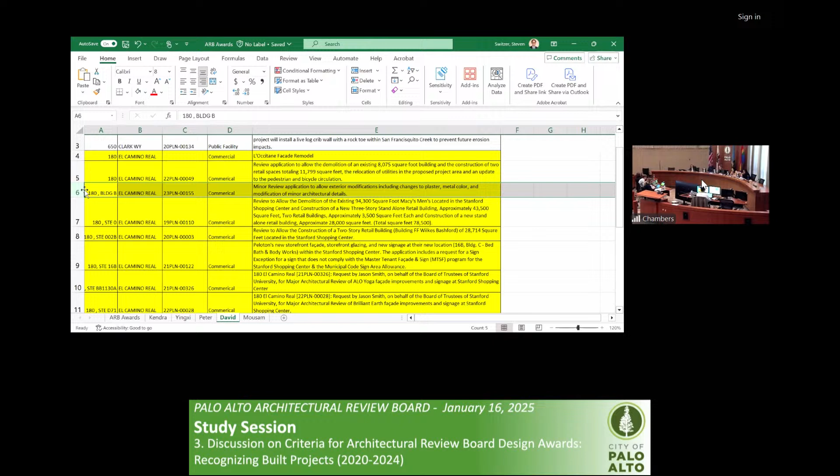Just for future commentary to staff, I think when we're dealing with these Stanford Shopping Center items, it's super helpful to have what the store name is right out of the gate. So like Peloton, got it, L'Occitane, got it, the ALO, got it, right? I think having that as the first item in the description is super helpful, it does help.

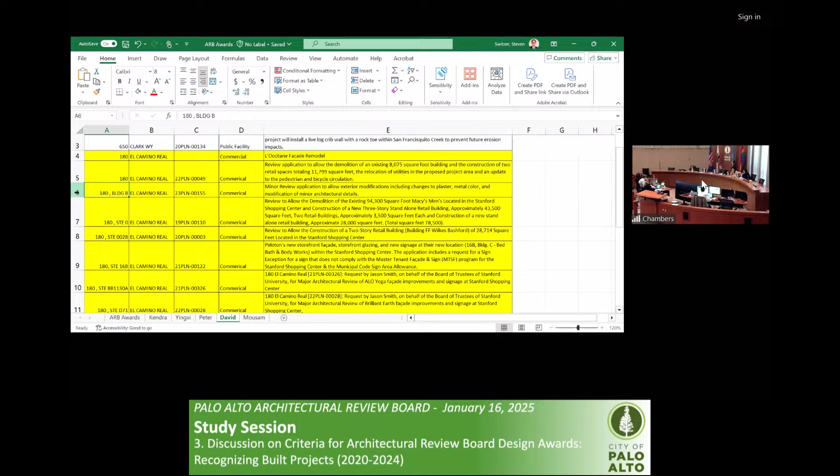And I made a mistake, it was listed as our house here, and it's not our house, it's our hus, H-U-S.

Minor review application, allow exterior modification changes to plaster, metal, that's number 4 on my list. I don't think anything much is part of that description anyhow, so I can't exactly recall what it was, but I don't think it's necessary.

So the next one is Restoration, so that's definitely part of the list. Next one is Wilkes Bashford, which I think is finished now. Peloton, I don't think there's much done there - it's a smaller store. But this list includes a lot of big buildings that are significant.

Continuing, the yoga facility, similarly small amount of work. If I may, just for clarification - are you listing the ones you would like to be considered? Yeah, I mean, I can keep them on in case somebody thinks there's something worth talking about.

I know, for example, we spent a lot of time on Brilliant Earth, and it's a very, very simple little piece of work there, but we significantly had detail on that one.

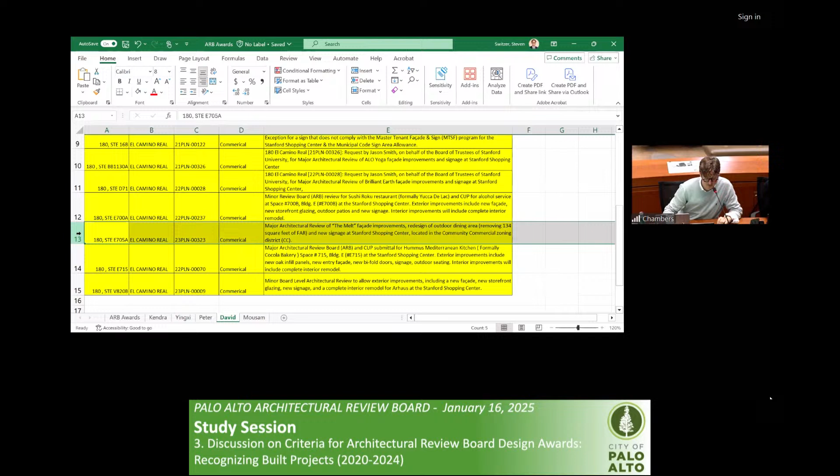My question would be, do you have any, David, that you'd like to highlight as well? So as I put two of mine in bold, is there anything you'd like to say special attention towards? Well, I think we all like the ultimate Aarhus design - Restoration, I think there was a lot of work on it, whether we want to be awarding something that's more or less a traditional kind of building like that versus something like...

Well, another one was - sorry, this is through the chair - like Brilliant Earth, which was just a pretty little piece of work in the corner, out of the way, but it's significant in terms of the design, and we were very detailed in our description of how it should be put together.

Just to clarify, what we're doing today is shortlisting what's complete, and at a future time we'll discuss and as a group vote on whether they're eligible or if they are worthy of award or not, right? Uh-huh. So yeah, it's mostly a shortlist of viability.

The reason I'm asking for some of the emphasis, if you have it - again, it may be that there's none on your list for now, but for example, I personally think Sushi Roku was quite lovely, right? So I think that's one that maybe we go back and get additional photos of or something like that.

Oh, for sure. And just making sure it's not stricken from the list now for some reason or another. Correct, and that's not to say that...

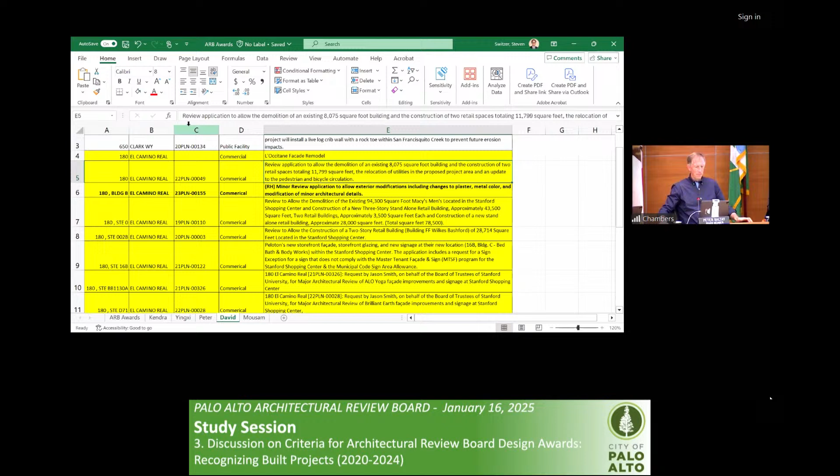If you could highlight numbers 5 and 7, rows 5 and 7. Is it light yellow, question mark? What is there? Oh yeah, you know what, building B, okay. Sorry, I'm trying to figure this out. I think building EE did include - one of those might have been just a modification, because restoration hardware came back with like a minor board level modification, I think.

Which one is restoration? I think I've mixed it up, because I think the 5th on the list is really not restoration. I think that's part of the question we're going over right now - to target restoration hardware and not necessarily the division of buildings, etcetera. Yes. I think we'll have to look into those a little bit further and we can come back to that next round. Okay, yeah, we'll circle back to that.

So Steven, to make sure I know which one is restoration, if you have a chance - sorry, we're having some trouble with the microphones here. It might be because we have so many on up here. I'll turn mine off.

As you were saying, Board Member Hirsch - yes, which one is restoration? So that would be, let's see here, that would be 23 PLN 00155.

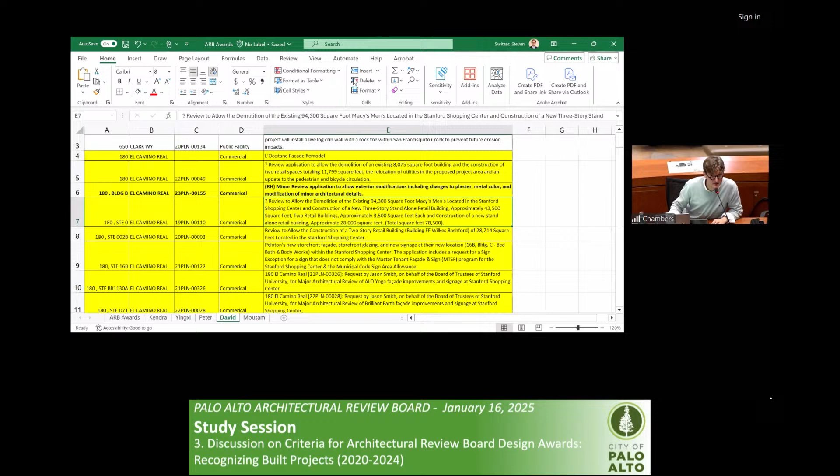So that would be the second column, permit number, or third, since the address is divided by - if I may, I believe that was when they came back for some minor modifications. Correct. The original building construction, and I'm just guessing, is the 5th one down, where it says approximately 28,000 square foot new building. I think that's correct. Yeah, exactly.

Sorry, but which one is that, for my sake? What number are down there? 2 in a row that are both restoration hardware - the one that's on the screen that's in bold, and the one right below it. Oh, okay, because it had to come back for modifications. So there's a 2019 permit number, 19 PLN 00110, and then there was another one right above it on the list from, I think it was 2023.

Okay, so the one that we would be referencing then is the 19 PLN one? Both could be referenced - I mean, the award could go to restoration hardware. Right, we're not giving the award by permit number, it's to the building.

So from the list, I believe we've narrowed down or removed 2. So is there any desire to remove any other? Yeah, well, I think we didn't talk about Peloton, and I would probably not choose that. Well, is that one built and done? Don't know, I guess I'm not sure - I didn't take another look at that one.

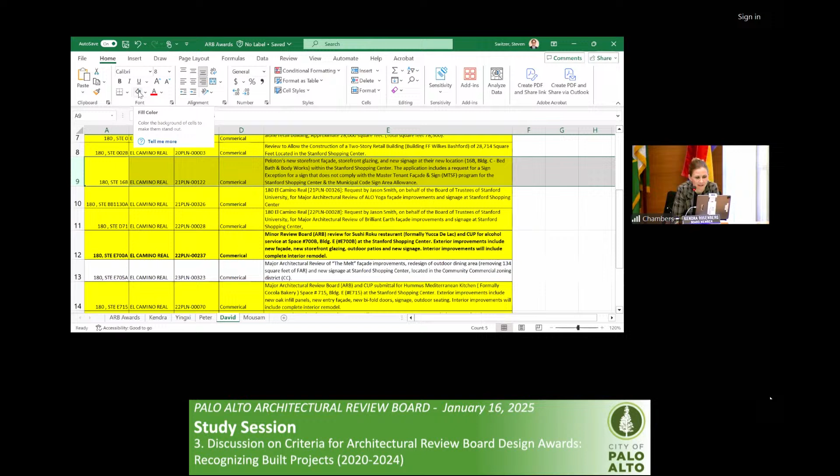The goal for today would be basically, based on how we looked at my list as well, remove the ones that are not complete, and then highlight if there's something special. Next meeting we will remove the ones that we just don't think qualify from an impressive standpoint - just, you know, let the cream rise to the top here. So I think we have at least 4 significant projects at the center, and they're all the major buildings really.

Okay, excellent. All right, next list. Yingxi, you want to take it? Yeah, so on my list there are actually only 3 projects that are completed, so I will just point out those 3. The first one is 2100 El Camino Real.

It's the grocery store.

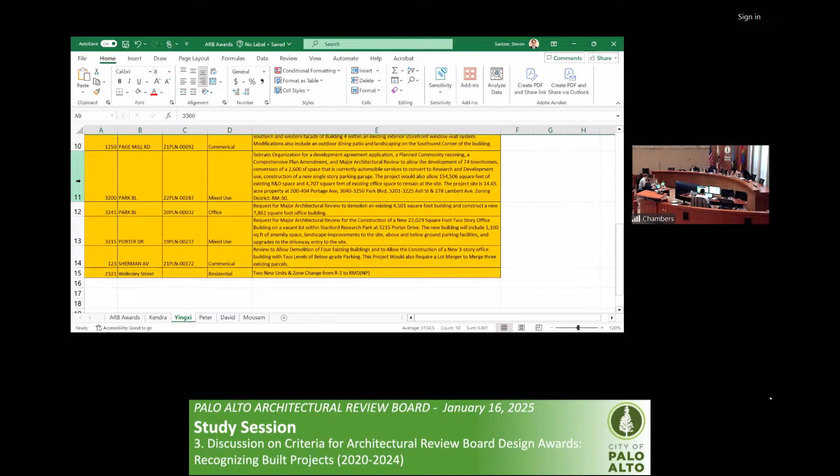And the second one that is completed is 1250 Page Mill. The last one at the bottom is 3215 Porter Drive, that's in the research park. And the one under construction, which I think could be a good potential for the next round, is 250 Cambridge Avenue.

That is on top, you can use a shortened lighter shade list. It shortened quite a bit, didn't it? Yeah, that's it, so 250 Cambridge. If you could use a different shade for the next time, I think it has a good chance, it's under construction.

Wow, I had a negative reaction to that going up there, like oh geez. So with these three that are completed, I think the Porter one in the research park, Stanford Research Park, has good potential for the nomination this year.

So Porter was complete, huh? I haven't been up there to see it, but it is, yeah, it's beautiful, really a nice project. Yeah, thank you for that short list. Yeah, it is quite short.